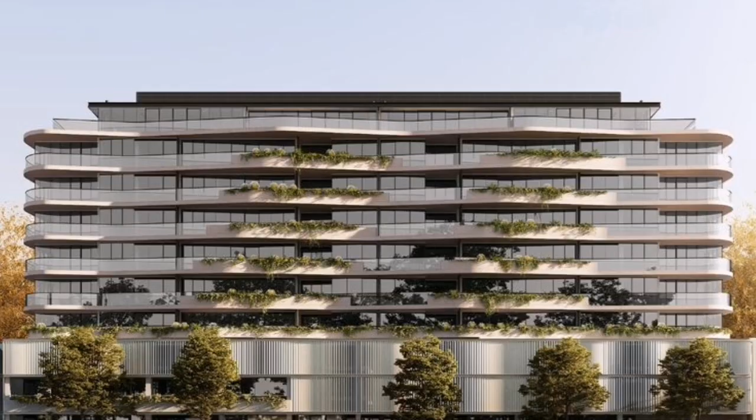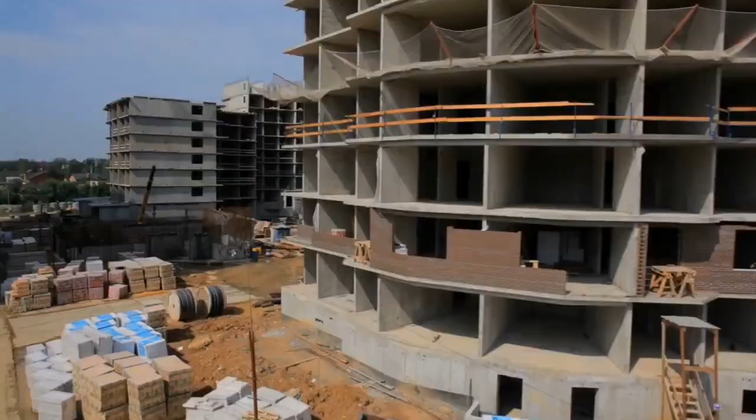This may come as a surprise, but buildings and construction account for 39% of all energy-related CO2 emissions. This provides an opportunity for green architecture to make a significant impact. In the past few years, the concept of sustainability has caught the attention of many disciplines. The reason for this opportunity is the ability to carry out sustainable development.

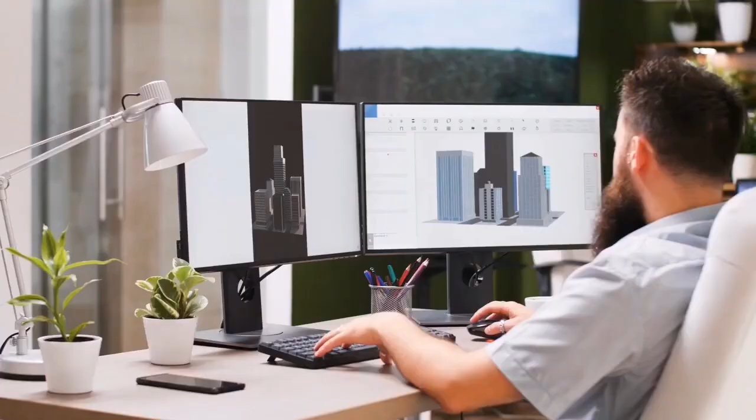Green architecture, also known as sustainable architecture or green building, is the theory, science, and style of buildings designed and built with environmentally friendly principles in mind. Green architecture aims to reduce the amount of resources used in the building's construction, use, and operation, as well as the environmental damage caused by the emission, pollution, and waste of its components.

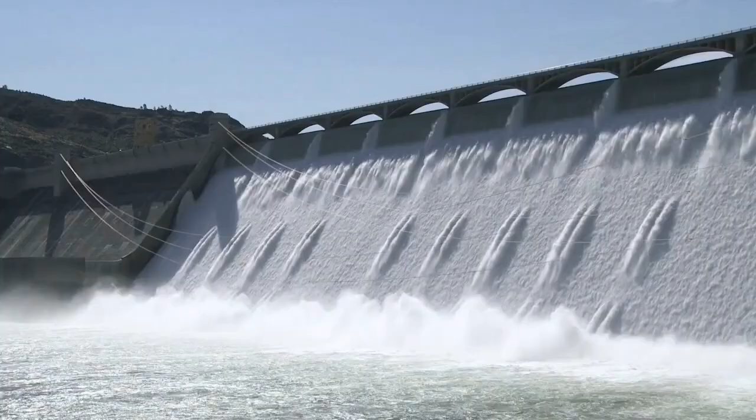To design, build, operate, and maintain buildings, energy, water, and new materials are used, and waste with negative health and environmental effects is generated. Green building systems must be introduced, clarified, understood, and practiced to limit these effects, then design environmentally sound and resource efficient buildings.

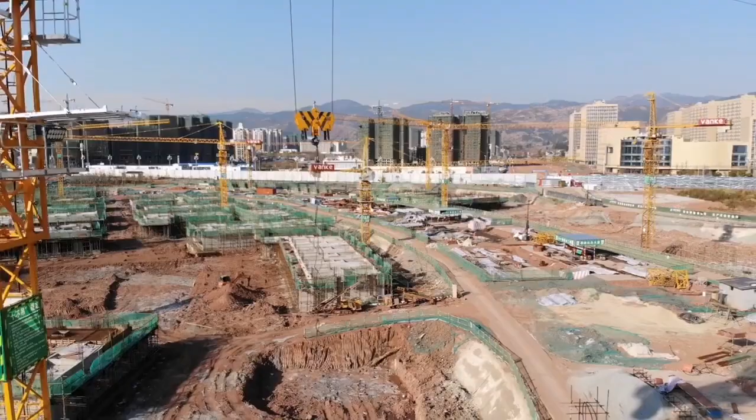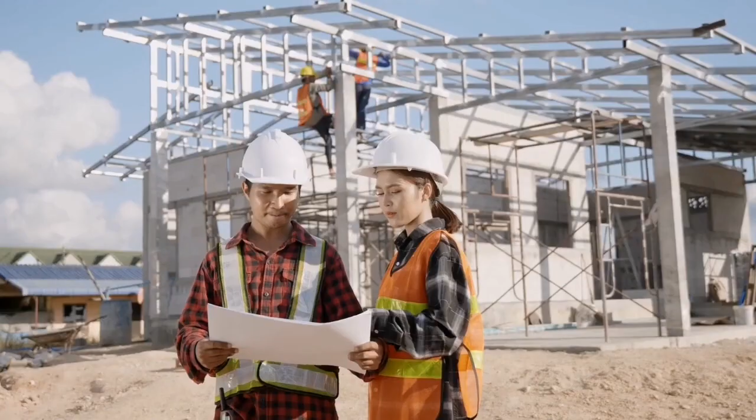Site planning. The site on which we build can influence every aspect of the building we choose. The primary goals for green buildings in site selection are planning, site plan, site selection, site layout, and reducing the impervious surface of the site.

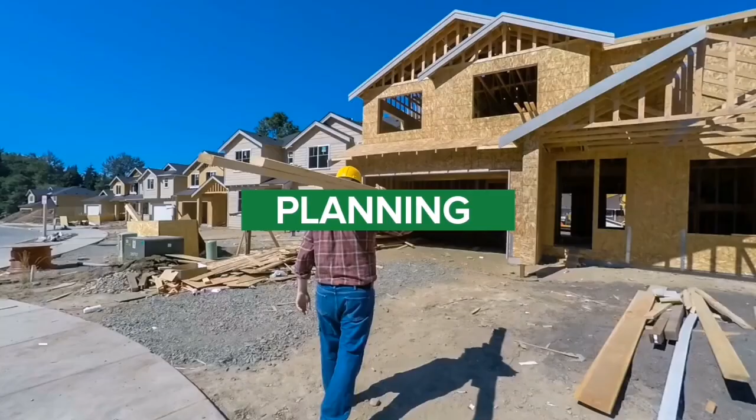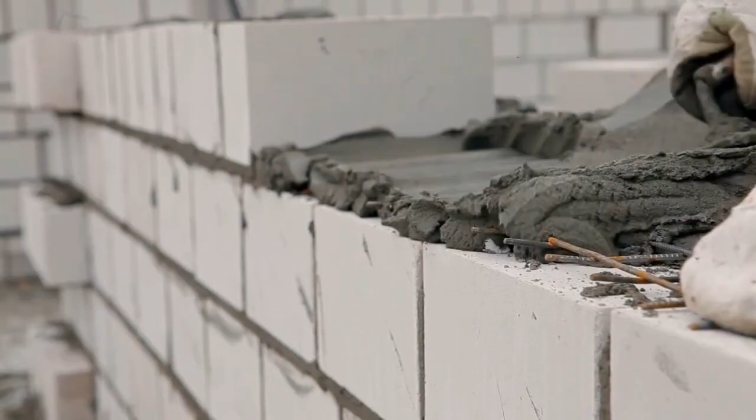Number 1: Planning. A collaborative approach is followed where the owners, engineers, architects, contractors, and important stakeholders work together to develop a sustainable design process. This helps to combine valuable inputs from different expertise.

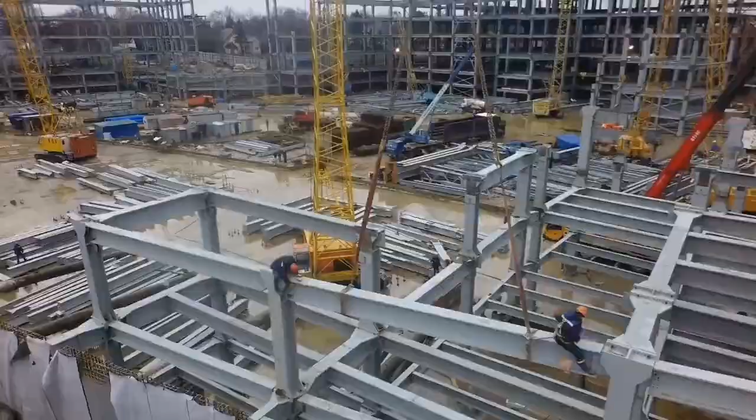Number 2: Site plan. Following the meetings and inputs, a long-term site plan is created. A sustainable site plan for green building construction is one that has a low environmental impact while meeting the client's project goals. The site plan must adhere to the project parameters while not jeopardizing environmental concerns.

Number 3: Site selection. The location must not be in a disaster zone. Floodplains should be avoided.

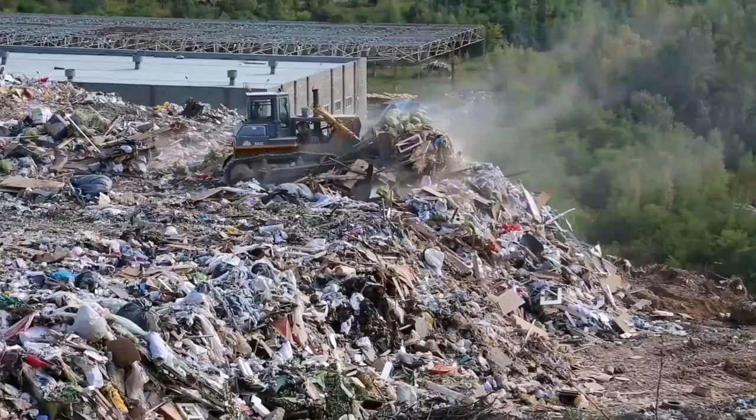If the building is to be built near water, buffers of undisturbed soil must be provided. The ease of transportation of resources for construction must be considered. The location should be convenient for public transportation and other modes of transportation.

Make sure that basic amenities like a bank, childcare, a post office, a park, a library, a primary school, a clinic, and a community hall are close to or on the site.

Site layout: proper building orientation or site layout can save up to 25% on energy. The following parameters are taken into account when building siting and orientation.

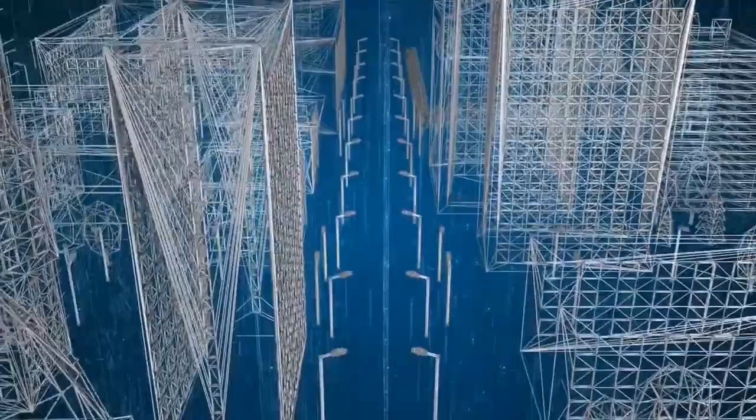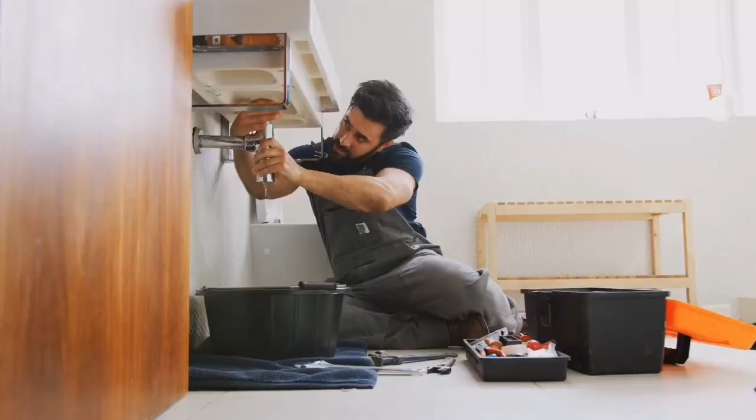Number 1: the plan is elongated along the east-west axis. Number 2: exposures to north and south are good for daylighting. Number 3: windows must not be provided facing east and west. Number 4: the most populated area must be oriented towards the north or south direction.

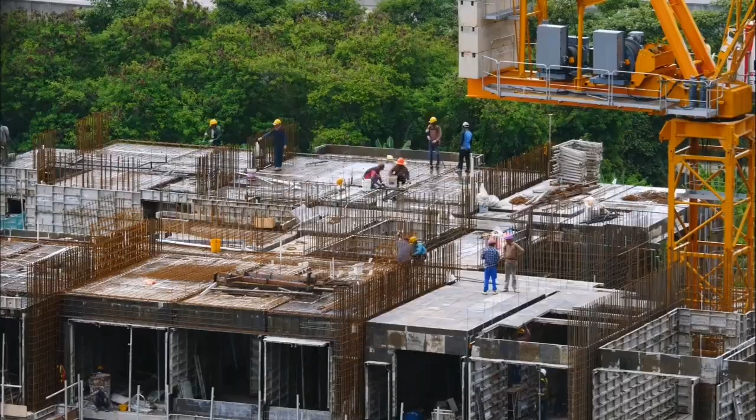Number 5: reduce impervious surface of site. Using a large amount of impervious surface throughout the site to avoid water runoff issues and to improve the aesthetic is not a sustainable practice. Increased impervious surface affects the groundwater recharge, resulting in the heat island effect.

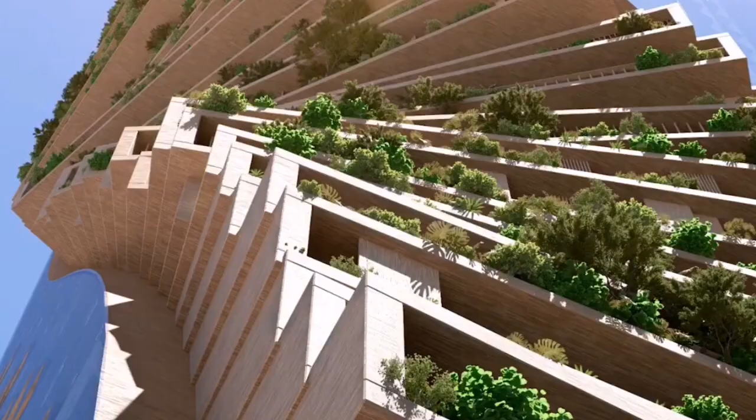Reduce impervious surface of site. Using a large amount of impervious surface throughout the site to avoid water runoff issues and to improve the aesthetic is not a sustainable practice. Increased impervious surface affects the groundwater recharge, resulting in the heat island effect. Limiting the impervious surface area significantly reduces the environmental impact. The following methods can be used to reduce site imperviousness.

Number 1: implementing green roofs. Number 2: placing plants around the parking area. Number 3: implementing permeable pavement operations.

Water management: water is the most critical resource, and all human activities rely on it. Water is used to drink, as a process in industries, to support wildlife, generate electricity, and cultivate crops. As a result, water is referred to as the elixir of life. Water has been most exploited due to its relative abundance and inefficient use in industry.

This so-called abundance is an illusion that encourages wasteful water use, ultimately leading to water scarcity in our country. Green buildings are sustainable structures that require water conservation, pollution prevention, and the use of gray water and recycled treated water while ensuring potable water is used only for potable purposes.

The fundamental principle of green building is water conservation. An effort should be made to ensure that the materials and systems used contribute to reduced water consumption in buildings. The principle of sustainable water management can be achieved by using an alternate source of water that can be supplied to meet water demand where the water quality does not have to be potable.

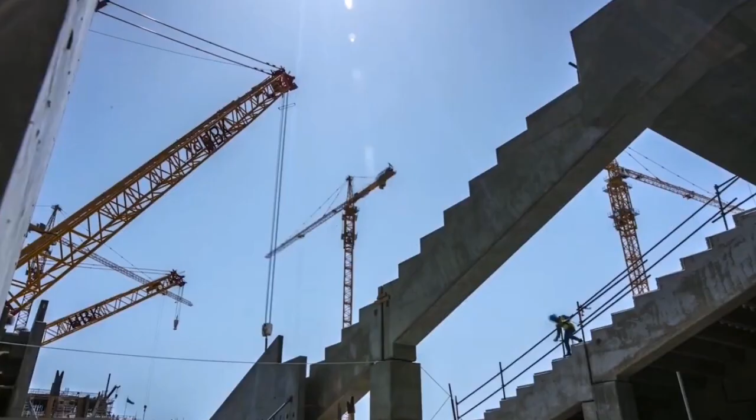Although most technologies are focused on making greener buildings, new advancements are constantly being developed to assist both organizations and homeowners in reducing waste, environmental degradation, and pollution, resulting in impressive economic, social, and environmental benefits.

Rainwater harvesting is one of the best examples of green building practices. Rainwater harvesting is probably one of the best ideas for making use of natural rainwater that would otherwise go to waste.

Rainwater that falls is lost forever, especially in areas densely packed with concrete buildings. That is why even the smallest building should have a rainwater harvesting system in place to provide a consistent source of water that can be filtered and refiltered to make it potable for human consumption.

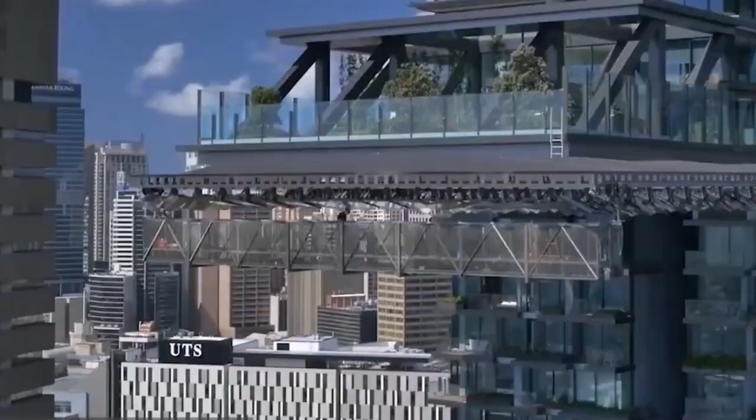Aside from being used in restrooms and water gardens, harvested rainwater can be purified using simple techniques to make it safe to drink. Rainwater harvesting has the advantage of being able to be done on both a small and large scale, with several thousand liters of water harvested.

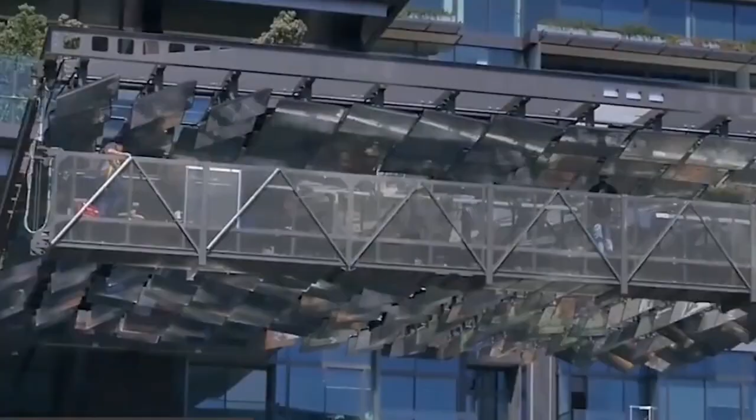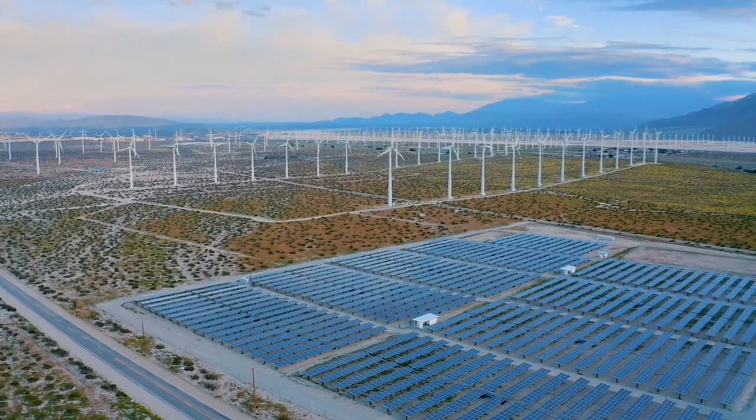Energy. The future of ecological sustainability in built environments is dependent on the thoughtful deployment of eco-friendly and smart energy management technologies. This entails utilizing cutting-edge technology such as the Internet of Things to reduce environmental impact by assisting in the identification and reduction of waste, increasing efficiency while simultaneously improving safety, comfort, and security.

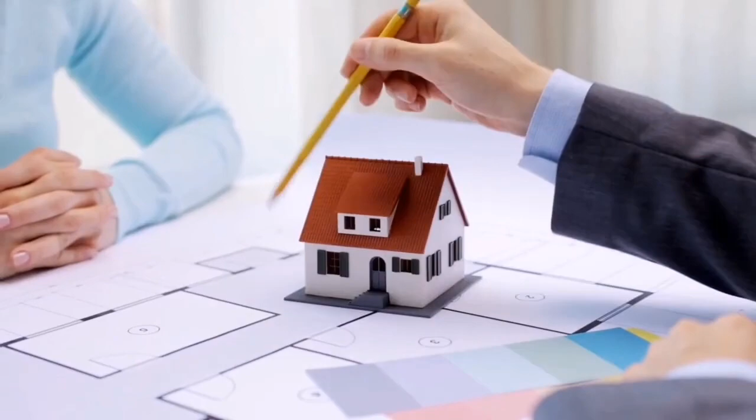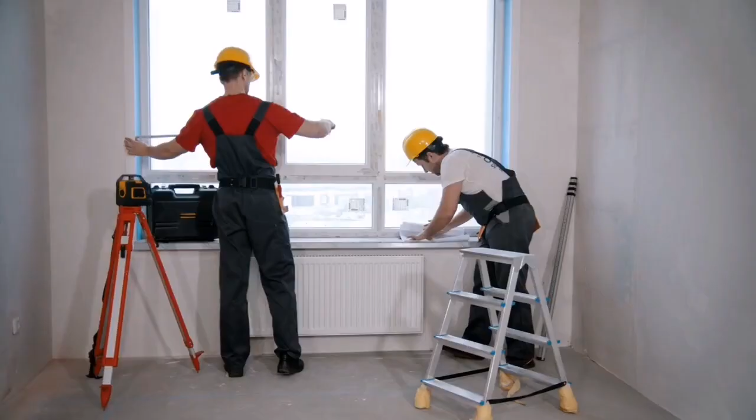Internet-connected devices such as smart sensors, locks, speakers, thermostats, or smoke detectors share data with a certain system, which collects and uses it to highlight issues and suggest areas for ongoing improvement. Building owners or occupants can customize these integrated systems, which can then operate without human intervention to optimize energy efficiency in green buildings using artificial intelligence.

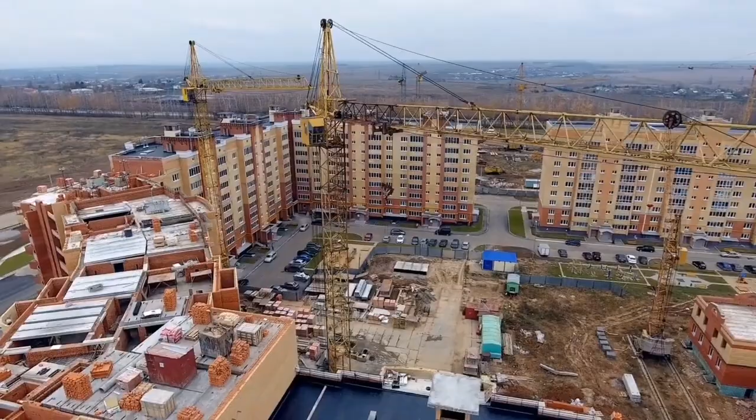Installing smart technology to monitor a building's environment does not always imply significant additional costs. In fact, deploying an analytics-driven building management system to improve energy efficiency in green buildings can reduce the cost of maintenance over time. When basic maintenance is supported by network-connected devices and smart building systems, greater efficiency can be achieved without requiring a great deal of investment.

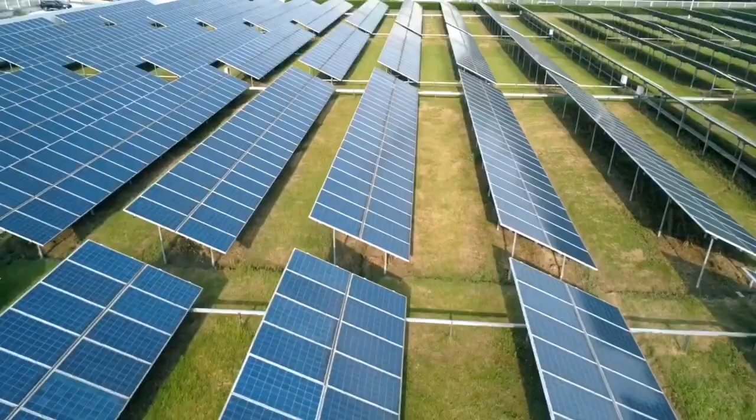Examples: lighting. Reduce energy consumption in green buildings by installing more efficient lighting, such as exterior solar-powered lighting or LED light bulbs. Dimming or turning off lights automatically when natural light is sufficient or when building occupancy is low helps to reduce energy consumption.

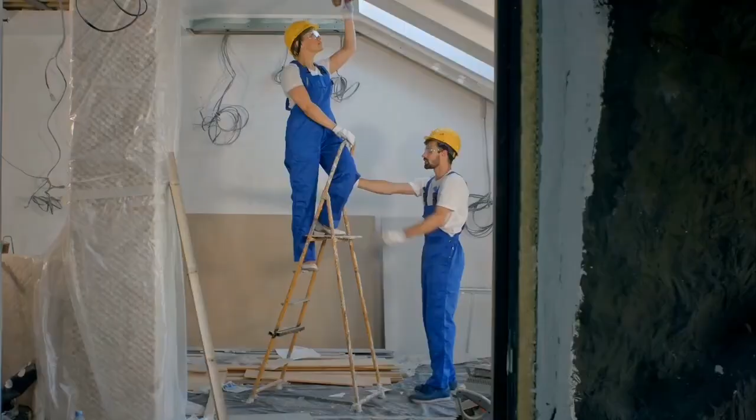Heating water. Water heating is another significant source of energy consumption, particularly in residential buildings. Energy consumption can be reduced without affecting users by adding insulation around water heating systems and installing sensors to control the heating mechanism. Connecting this to a central smart system that collects usage data can also identify times when hot water use is high, aiding in the detection of leaks.

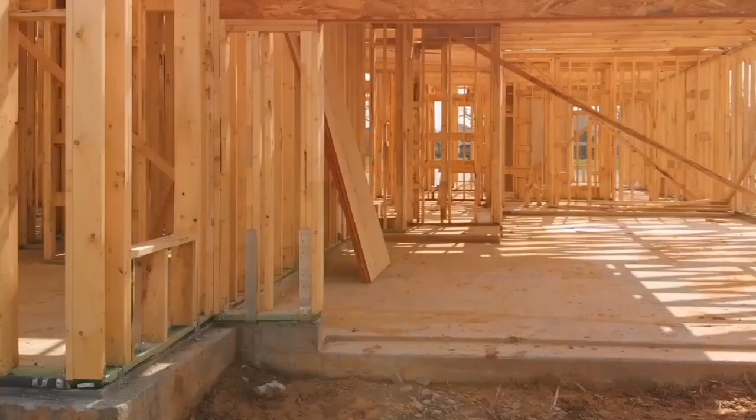Exterior and roofing. Exteriors and roofing areas are frequently sources of energy loss. They should be closely monitored, especially in climates with extreme temperatures and weather. Sensor data analysis can help identify energy waste points to justify upgrades to more energy-efficient roofing materials or direct cleanup efforts as needed. Basic maintenance measures to make exterior greener.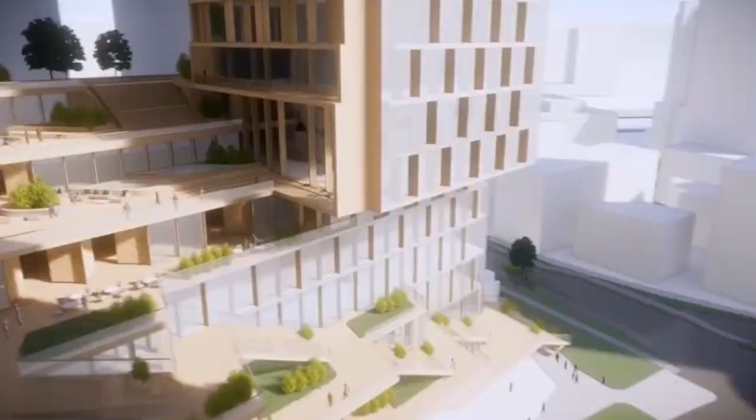Number 1. Clear debris from flat roofs to reduce standing water and prevent deterioration. Number 2. Ensure maintenance personnel use environmentally friendly cleaning products. Number 3. For slope roofs, ensure gutters are not blocked. Number 4. Remove mildew or mold residue on siding and windows with non-toxic cleaning agents rather than replacing them. Number 5. Replace or seal damaged roofing before winter, particularly for flat roofs to protect against leaks. Number 6. Replace, seal, or caulk windows and other openings to reduce energy consumption. Number 7. Use sealants approved by rating systems like Leadership in Energy and Environmental Design.

Roofs and sun-facing surfaces are also good spots for installing solar panels, and smart devices incorporated into buildings' exteriors can help maximize energy production. Sensors can also determine temperature differentials to identify areas where inadequate insulation or leaking systems contribute to energy waste.

Number 4. Integrating Internet of Things technology. The Internet of Things is a transformative and ever-evolving technology that promotes the connectivity of all devices to networks. When deployed in a building, IoT can assist your operations team in reducing energy consumption and improving building occupant comfort because network connectivity makes data from IoT sensors available to humans and machines for analysis and troubleshooting.

Master System Integrators, or MSI, are essential in ensuring that building owners reap the benefits of these technologies. They can deploy advanced software layers with deep domain expertise to integrate communicating devices, systems, or third-party applications into a unified front end with intuitive user interfaces that make it simple for all types of users to manage, monitor, and maintain their green buildings. Buildings IoT software and services improve green building efficiency, extend the life of your building assets, and improve occupant experiences.

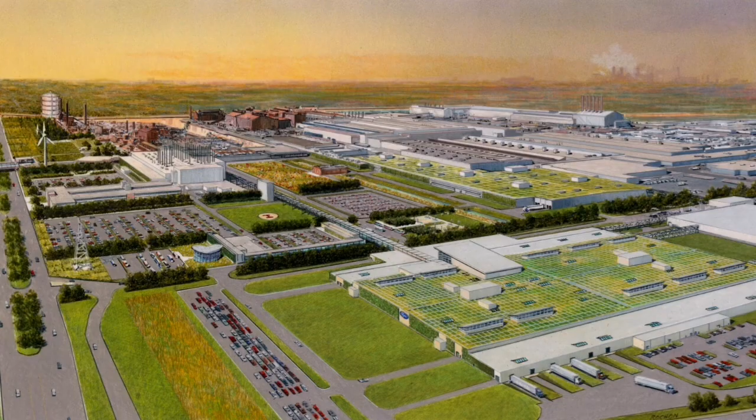William McDonough designed the Ford Rouge Truck Plant in Michigan, which has an innovative air delivery system to reduce ductwork, as well as the Adam Joseph Lewis Center for Environmental Studies that produces 30% of its own energy at Oberlin College. Additionally, McDonough is a co-founder of the Make It Right Foundation.

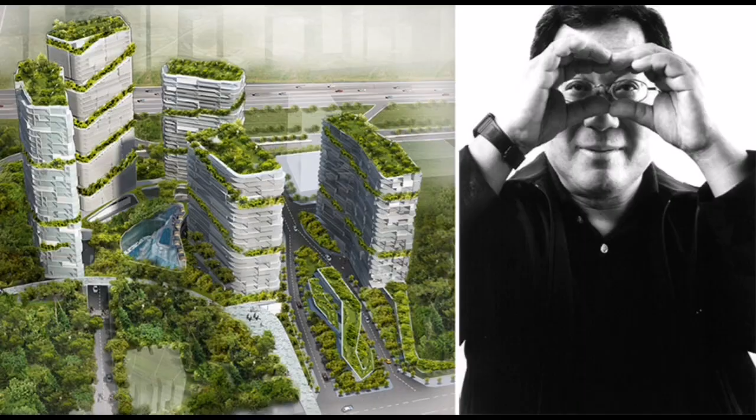Ken Yeang. This Malaysian architect focuses his career on designing sustainable structures that work with nature. He created the bioclimatic skyscraper, which has shaped the way architects design skyscrapers around the world. Essentially, he uses the surrounding environment and vegetation to drive his design instead of competing with it.

Ken Yeang also believes that structures must have beauty or they face rejection. In addition to his architectural designs, Yeang has published books on ecological design and won several awards.

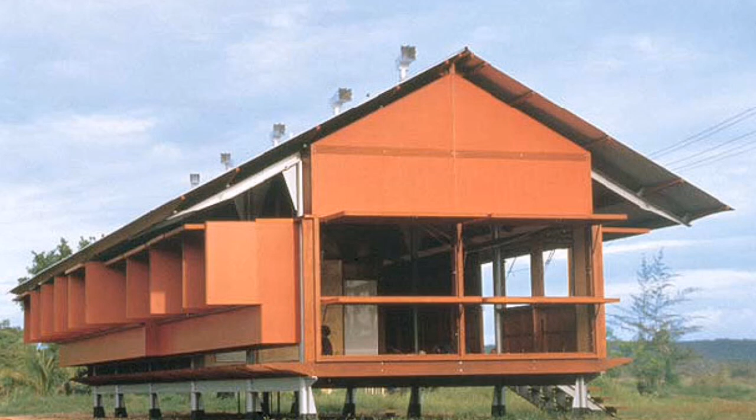Glenn Murcutt. This Australian architect has been working on modernist buildings since the mid-70s. He likes to position buildings so that they absorb the most sun and have good airflow, which is why all of Glenn Murcutt's designs are open concept. He is one of Australia's most famous architects and has won several awards, including the Pritzker Prize.

Murcutt mostly works on homes, but he also designed the Arthur and Yvonne Boyd Education Center.

Renzo Piano. This Italian architect is arguably the most influential green architect in modern history. He doesn't stick to stereotypical sustainable building shapes or materials, but he still incorporates green elements in his design.

One of Renzo Piano's famous designs is the California Academy of Sciences, where a museum houses an aquarium and planetarium. The real show-stopping component, however, is that Piano built it into the side of a hill, so it really blends into its environment. The building needs no air conditioning, and it actually absorbs 2 million gallons of rainwater every year.

Piano also worked on the Stavros Niarchos Foundation Cultural Center in Greece.

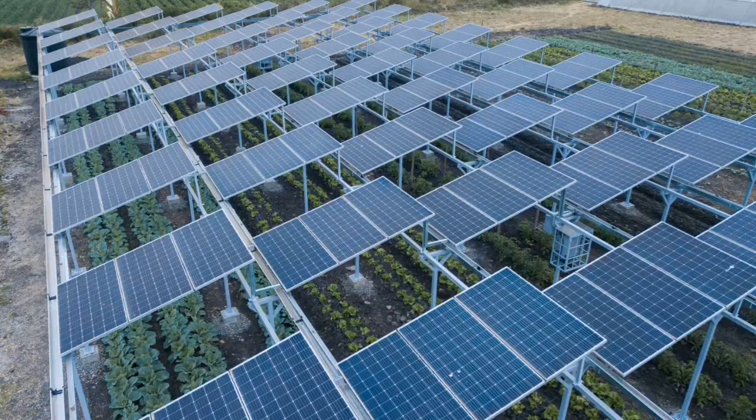Rolf Disch. This German architect's designs focus on incorporating the power of the sun. Since solar energy costs are not as high as they once were, Rolf Disch takes full advantage of solar power to make his architectural designs sustainable.

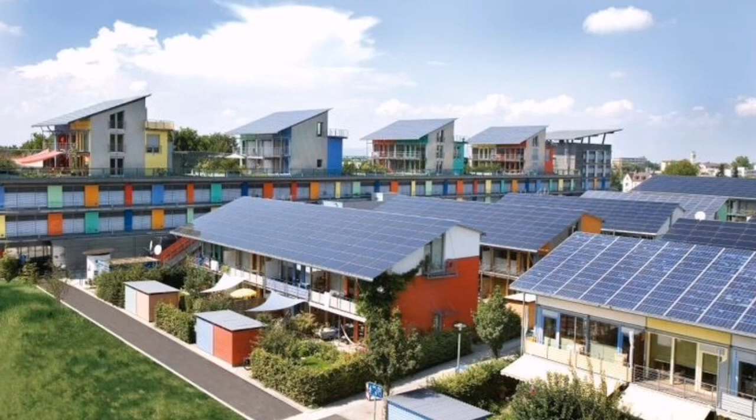He is most famous for the Heliotrope, a residence that he constructed for himself that harnesses the optimal level of natural sunlight to warm water and generate electricity.